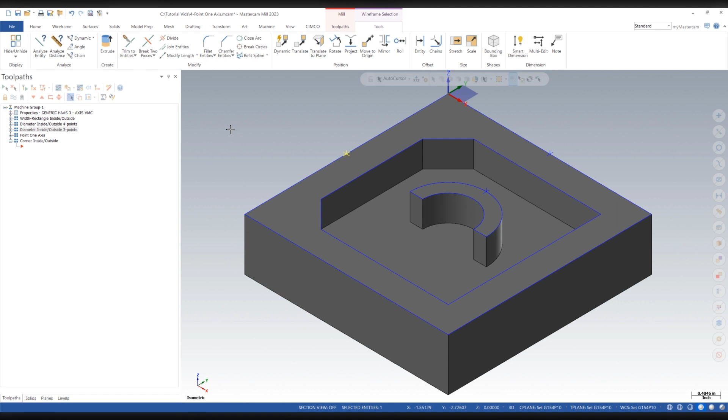To get started, we can click on the CIMCO Cycle Probing icon located on our CIMCO tab and go to the Workpiece Datum category. We're going to start with the Corner Outside cycle.

The workflow will be identical to our previous cycles, and because I had already selected a probe, we can bypass this and enter an operation comment if you wish. If you do not already have a probe defined, please watch our tutorial video on how to define a probe.

Next, we will click on the Cycle tab, followed by right-clicking in the Geometry section. You'll notice that now in this cycle, we have the option to select our geometry from lines. This can either be wireframe lines and/or solid edges. In our example, we will select the two intersecting lines in the corner in which we wish to probe.

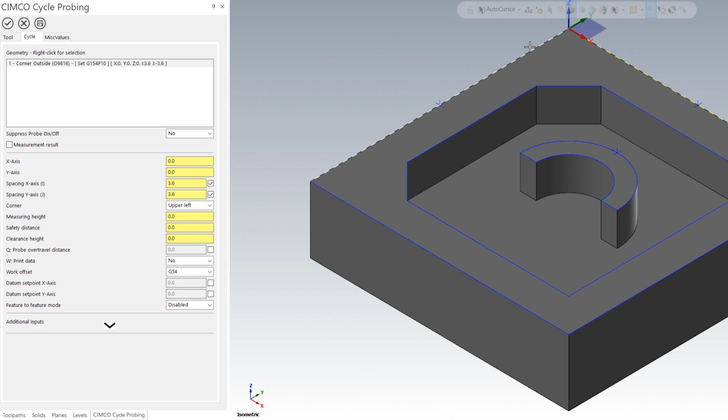Once we do so, CIMCO probing is now associated to that geometry, and we can start defining specifics to that probe path. Looking at our current settings, you will notice that the x-axis, y-axis, along with their spacing and corner orientation, were defined based on the selected geometry.

We can then define the specific measuring height, safety distance, clearance height, and a few other settings for this particular path as needed. The Renishaw corner inside and outside probing cycles will allow for an optional spacing in both the x and y axis. This will allow you to dictate whether you would like to probe at 1 or 2 points along each edge and their respective probe positions.

From here, we can define the measuring height by simply typing in a number, using your right mouse button click menu and an option such as z-coordinate of a point, or use the center mouse wheel in order to scroll up or down, as this will increase or decrease the value. I will set mine to -0.250.

We can do the same thing for safety distance, as this will be the standoff distance from the part that the probe will position. I will set mine to 0.250, followed by the clearance height, which is the height that the probe will rapid to, from, and in between cycles.

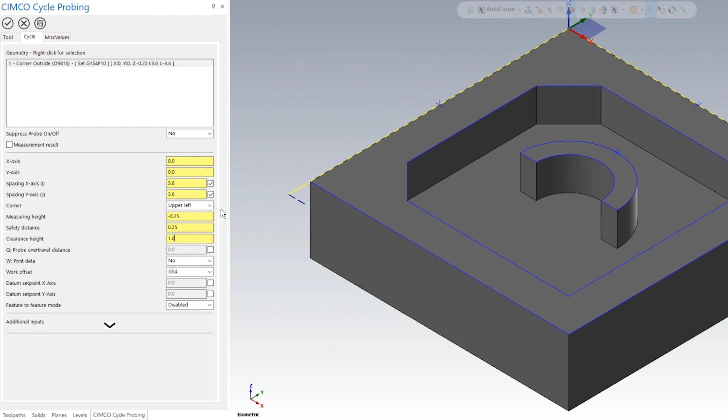Now that we have the basic values input, you can see a visual of the probe path on your screen and can adjust any of the values to get a live updated feedback.

We can set an over-travel distance if you wish, as this will allow the probe to travel past the expected coordinate without alarming out, along with the work offset number that we are currently using on the machine and wish to update. In this example, we will use G154P10.

Within the cycle, you will also have an option to print data, which would print out a probing report based on your machine's I/O channel and parameters.

We can also shift the work offset by a certain value after it is set by using the datum set point options. Finally, you will notice a suppress probe on and off and a measurement result tick box.

The suppress probe on/off will keep the probe turned on while it's probing in between cycles and can be set per operation. The measurement result will allow you to copy the probe's results into specific user-defined variables on your CNC controller so they can be referenced later.

This is important because the standard variables that Renishaw writes into are constantly being overwritten per probing cycle. The feature-to-feature option will be covered in its own tutorial.

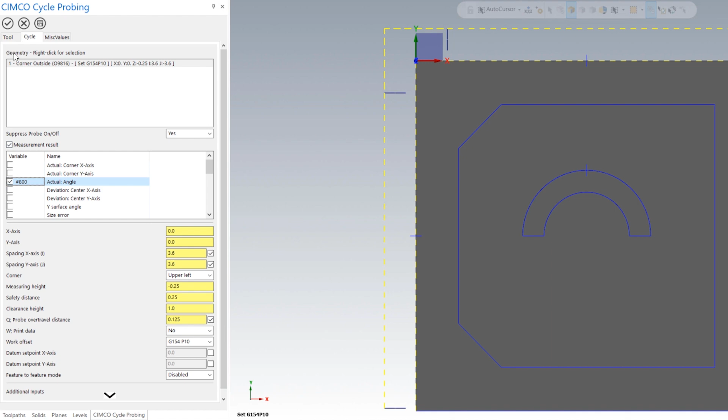Once you check out of the cycle, we can simulate it within Backplot, Verify, or Machine Simulation and see how it looks. You'll notice that the cycle will probe along each edge, finding their position and intersection point, along with setting it as my origin.

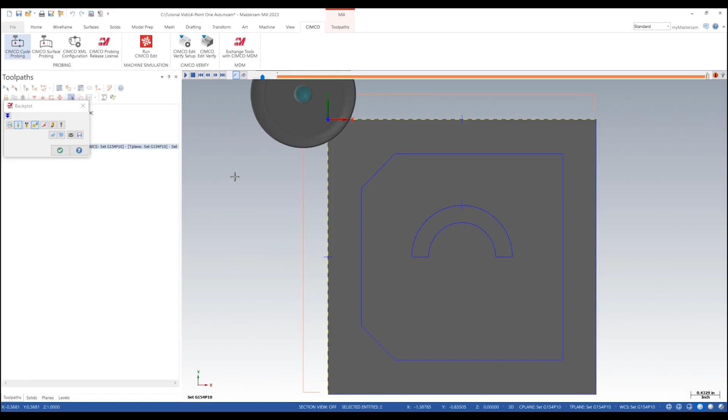Now that I have set a corner outside, let's switch gears and this time use the corner inside datum cycle, assuming that I have an origin based on an internal corner. In order to create this cycle, let's first start by adding a new plane to one of the internal corners.

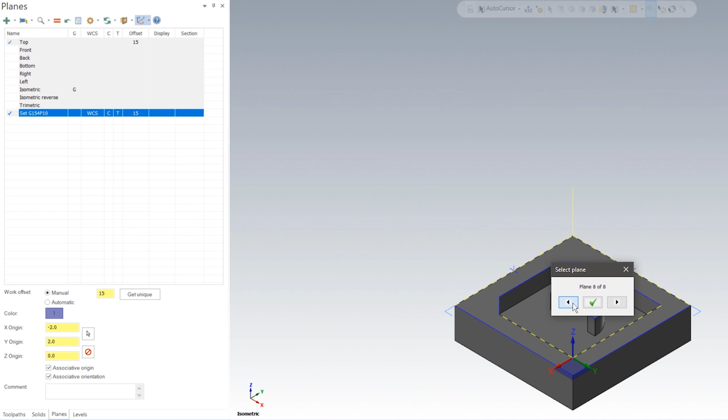We can then click on the CIMCO cycle probing icon, workpiece datum, corner inside. We will enter an operational comment if you wish, followed by clicking on the cycle tab and then right-clicking in the geometry section. Similar to corner outside, the corner inside will allow the same geometry selection of lines.

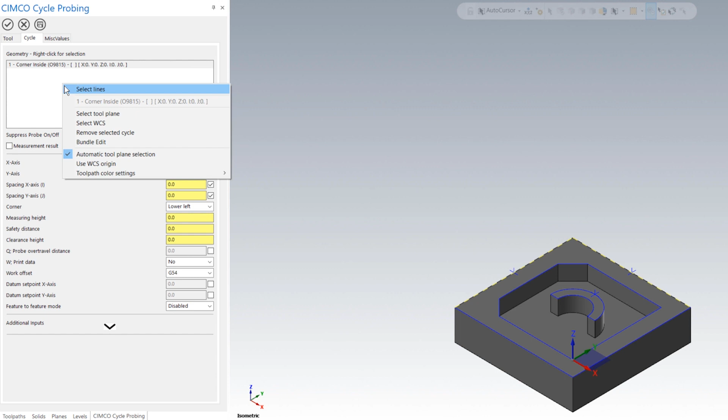Again, this can either be wireframe lines and/or solid edges. Once we select on the two internal intersecting lines, CIMCO probing is going to be associated to that geometry, and we can start defining specifics to this probe path.

Again, you will notice that the x-axis, y-axis, along with their spacing and corner orientation were defined based on the selected geometry. We can then define the specific measuring height, safety distance, and clearance height along with the other settings for this particular path. The Renishaw corner inside probing cycle will allow for an optional spacing parameter in both the x and y axis.

This will allow you to dictate whether you would like to probe at 1 or 2 points along each edge and the respective probe positions.

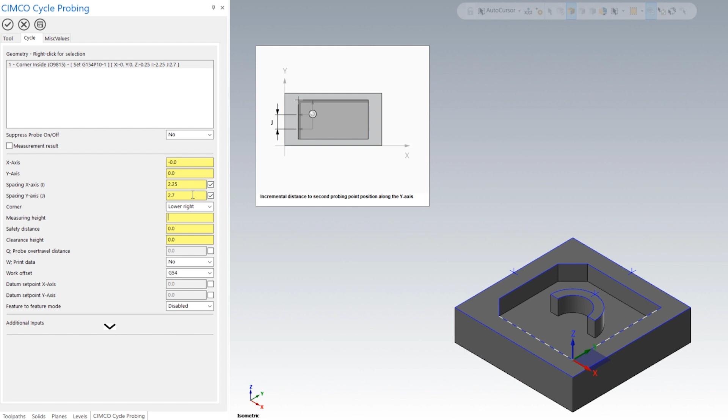We will again define the measuring height to a minus 0.250, our safety distance to a positive 0.250, and the clearance height to 1 inch. From here we can enable our over travel distance and set it to a 0.125.

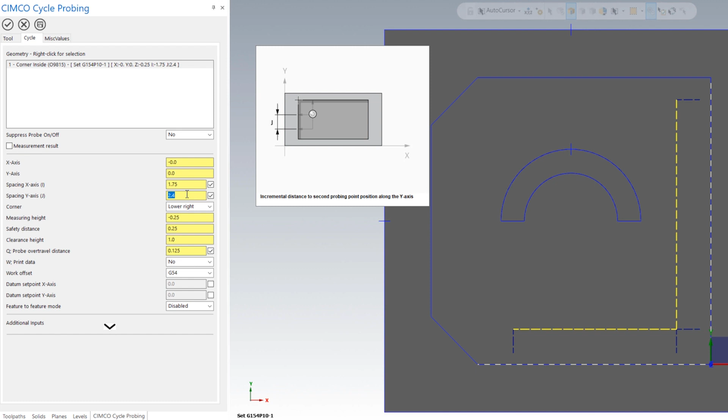We should now see a visual path on our part and can adjust any of the settings if needed before closing out. The last thing I will set is our current work offset number that we are using on the machine and wish to update. Again, in my example, it'll be G154P10.

Once we click OK and check out of the cycle, you can simulate it within Backplot, Verify, or Machine Simulation and see how the path looks. Let's post out the code to see how it looks and how it would run on the machine.

All of this information can be referenced by looking at the Renishaw Inspection Plus manual.